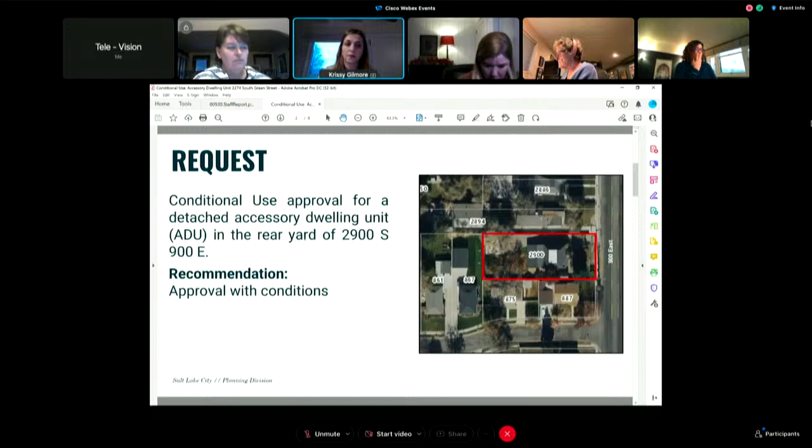So the ADU will be located in the rear yard of the single-family home, above a new detached two-car garage. The ADU will be 650 square feet, and the garage is proposed at 720 square feet. The ADU will be 12 feet from the north side property line, and 10 feet from the rear property line. One parking stall is provided for the ADU adjacent to the structure in the driveway, though the property is located within a quarter mile of a fixed transit stop.

A bus stop is located directly in front of the house and would not require additional parking. The building is proposed with a height of 20 feet, where the main house is also 20 feet.

So accessory dwelling units can be above the 17 foot maximum, but they can't go up unless they're the same height as the main house. They cannot go above 24 feet though. So that is why this one is allowed to go up to 20 feet, because the main residence is also 20 feet.

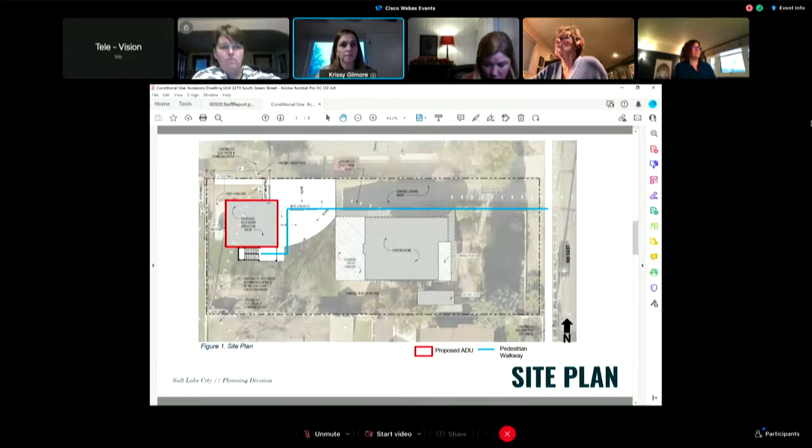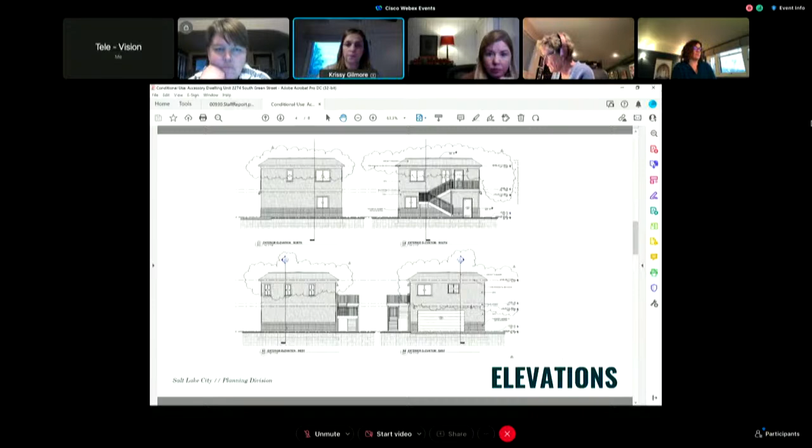So as far as public comments, staff received several public comments in opposition to the proposed ADU. They were primarily concerned with the height, general neighborhood compatibility, and concern regarding the ADU being used as a short-term rental. So staff has added one suggested condition, which was also at the request of the Sugar House Community Council.

That makes it clear that neither the main home nor the ADU can be used as a short-term rental. And then, as mentioned earlier, planning staff recommends that the commission approve the conditional use request with the one condition. The proposal meets all applicable standards in the staff report. So that concludes my presentation, and I'm happy to answer any questions. The applicant is also on the line.

Okay, Andrea, I saw you raise your hand. Any question? Thanks so much for your work on this.

I am confused because we already have a bylaw, as I understand it, that prohibits short-term rentals of any kind in Salt Lake City. So it seems like this condition is redundant, and I don't know why we would add it. Yeah, and you are correct on that. We do, the ordinance already states that they can't have a short-term rental. This is really the request of the community council to make that extremely clear that it cannot be used as a short-term rental. And it's up to the commission if you want to include that or not. But yeah, it is a given that they can't have a short-term rental. It just seems like we're adding paperwork here where we don't need paperwork. There's already a prohibition on it.

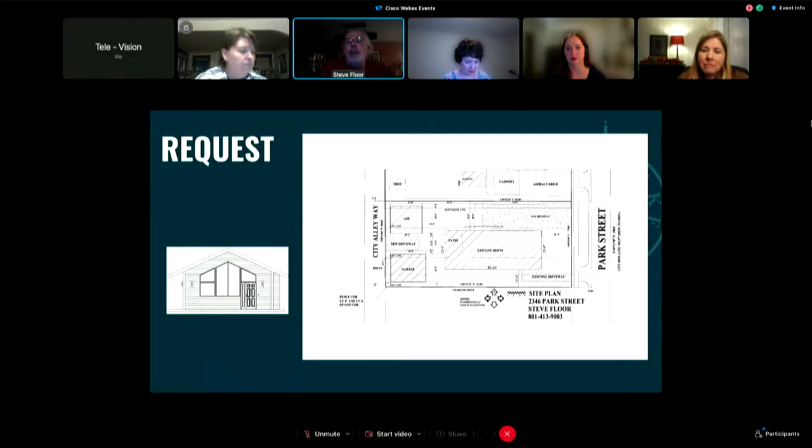Caitlin, I submitted to you a more updated site plan, but that was for purposes of utility lines, and I don't know if that needs to be looked at or discussed now, but it's sort of a better drawing, more up to date, with less superfluous information and more significant, important information, but I don't know if that needs to be discussed in this meeting or not.

I'm happy to pull that up if you'd like to display it, Steve. Sure, I'm proud of it, paid my architect a lot for that drawing.

Also, one thing the architect just missed is that to match the existing house, the ADU and the proposed garage will also be stuccoed in the same way as our existing house. It's not going to be lap siding as he showed in the drawing.

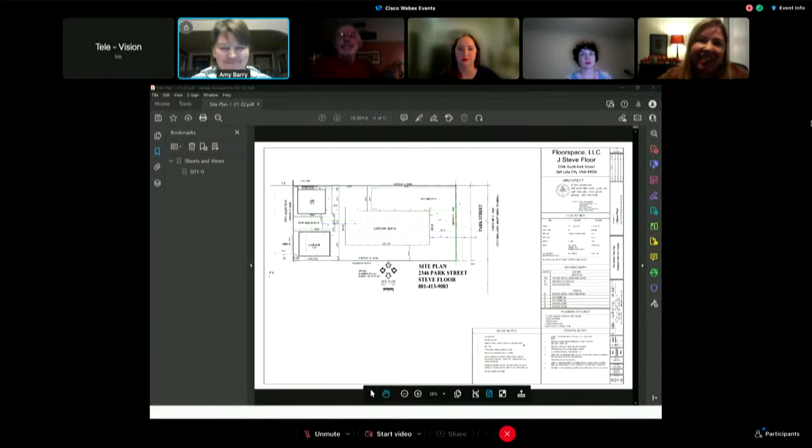All right, okay, here's that updated drawing. Ooh, that's beautiful. That's our new driveway. I was gonna say, well, how do I get one of those? You're transforming the place. Yes, we are. That's it, that's it.

Once again, it's essentially the same, and I think the stuff that's most relevant to the Planning Commission was also on the previous drawing, but here's the updated one showing, once again, utility lines, but I don't think that's something you guys want to discuss here and now, but if we want to, we can.

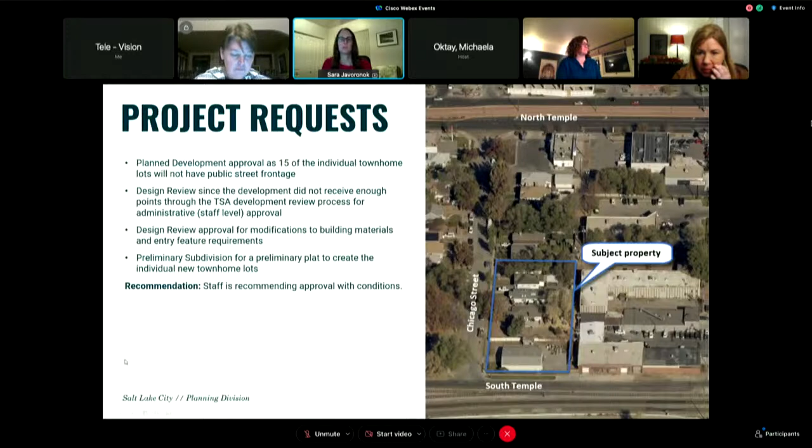To give you a brief overview of the project, the properties are located in the TSA UNT zoning district. The North Temple master plan is applicable to this area. The subject property includes 6 existing parcels with a total area of over 36,000 square feet. The proposal is for 4 buildings with a total of 30 townhouse units, with 7 to 9 units in each building. Each townhouse is to be located on its own lot. The exterior materials are primarily brick veneer, fiber cement siding, glass, and stucco. Each unit has an attached garage, with 16 units having single-car garages and 14 units having tandem 2-car garages.

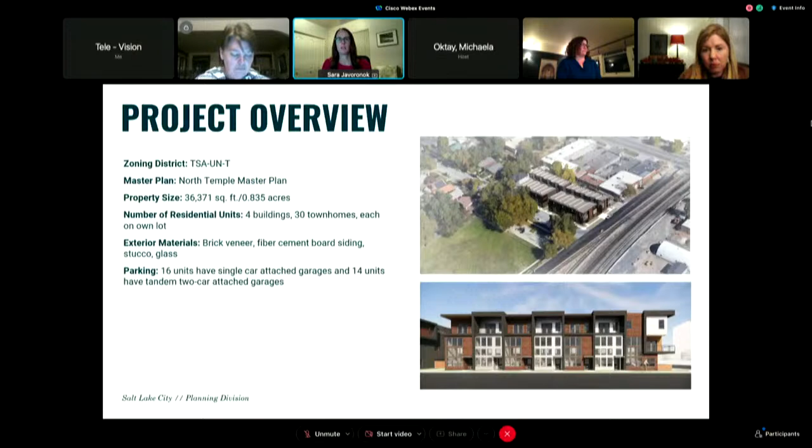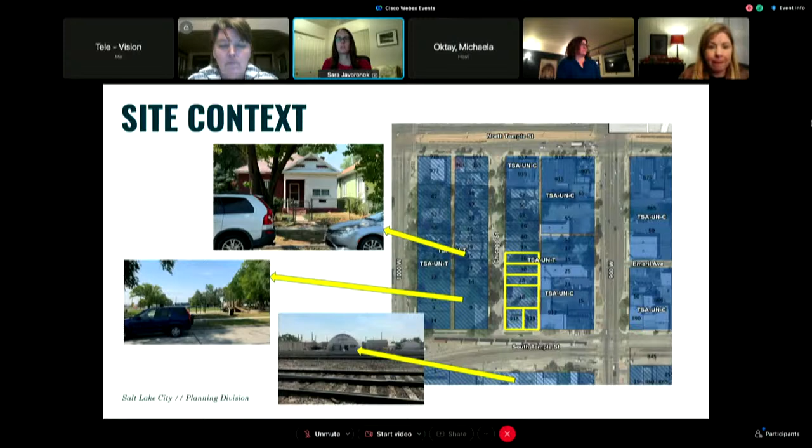There are a number of applicable standards, including the standards for the TSA zoning districts, the design standards in 21A37, and the standards for the 3 review processes: the planned development, design review, and preliminary subdivision. Detailed analyses of these are in the attachments to the staff report.

The applicant has requested several modifications from the standards through the planned development and design review processes. The planned development request is for lots without frontage. 14 of the 30 lots do not have frontage on a public street as required. Additionally, rather than complete a condo plat for the property, the proposal is for additional individual townhome lots, which may allow for additional financing options, including FHA loans. Staff recommends approval of this request.

This is a rendering facing northeast at the intersection of West South Temple and Chicago Streets, and it shows two of the design review requests. I'll talk a little bit more about these. One is for the stucco architectural element shown in the dark brown, and the other is for the entries on Chicago Street that do not recess or have canopies of the size required by the zoning district.

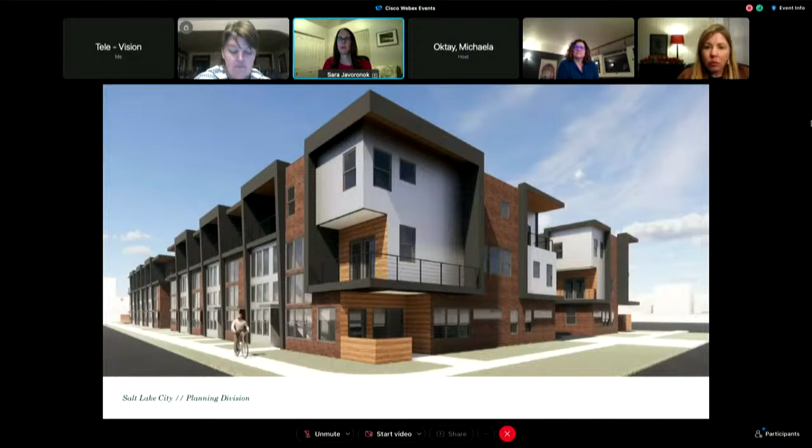Going into a little more detail on the design review request, it's for modifications to design standards in the base TSA-UN-T zoning district and also the standards in 21A37. Additionally, the project did not receive enough points for administrative approval and is required to go through the design review process. The first design review request is for the proposed stucco shown in the dark brown on the rendering and also visible on these elevations. The proposed stucco exceeds what is permitted for stucco or EIFS in the zoning district. The intent behind this regulation was to avoid larger areas and walls covered with stucco or EIFS. As proposed, the stucco is an architectural element rather than the flat blank wall that can be created with stucco or EIFS.

The second request relates to the building entrances. The design standards require that entrances have canopies, awnings, or recesses that are at least 5 feet. As proposed, the canopy is 2 feet and the recess is 4 feet 3 inches, which is less than the required 5 feet. However, it's staff's opinion that they meet the intent of the standard by breaking up the facade in 2 ways, with a combination of the recessed entry and the 2-foot canopy. Staff supports both of these requests.

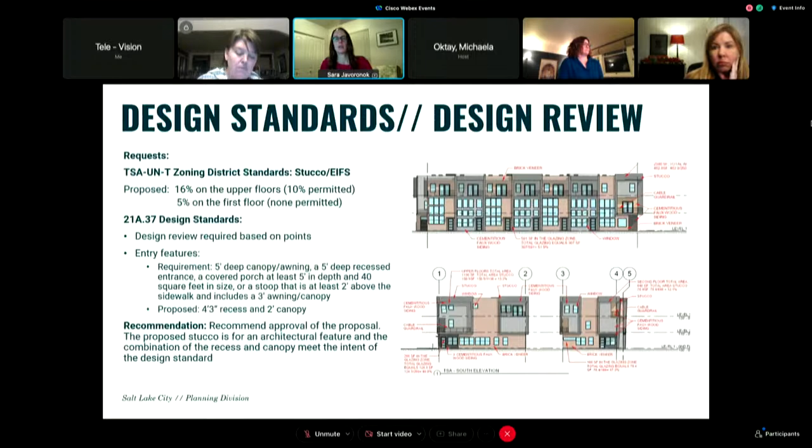As identified in the key considerations, the proposal is consistent with the city's adopted planning documents. The proposed townhomes meet the characteristics identified for development in this area and increase the variety of housing options. They're also located close to the sidewalk and have parking located behind and interior to the buildings. Additionally, the townhome lots are likely to provide homeownership opportunities.

As for staff's recommendation, staff sent notice of the proposal to the community council and did not receive a response. Staff did receive one phone call from a member of the public with questions and comments, which are noted in the staff report. There have also been 3 email comments submitted after the staff report was posted, and these have been added to the Dropbox. Staff recommends approval of the proposal with the conditions included in the staff report and identified on the slide.

Additionally, the applicant is here and has a presentation and is available to answer any questions. Are there questions for staff at this point, Commissioners? Okay, I don't hear any, so it looks like just Jarod Hall is up for presenting.

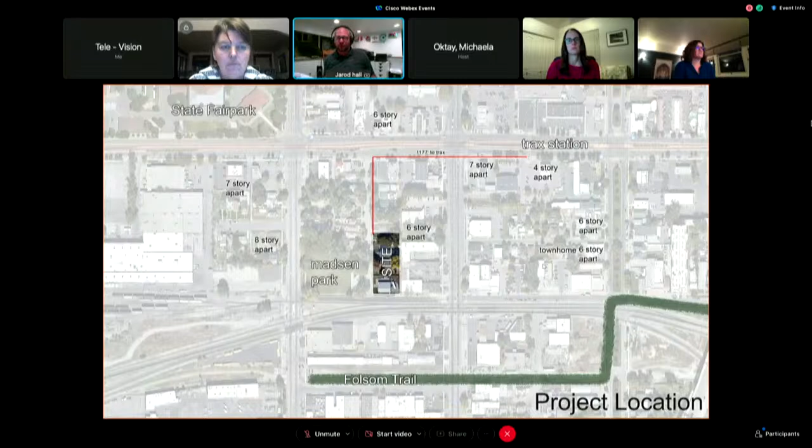So I'm Jarod Hall, the architect on this project, the Chicago Townhomes project. This is our context map showing where our site is located, at the corner of Chicago Street and South Temple, across the street from Madsen Park. It also notes so many of the other projects coming to this area, which are primarily apartment buildings because the zoning allows for apartments. So we're excited to be part of a townhouse project, providing a little different housing option here. Some images of the context.

That's one of the buildings in the area under construction. These are the more commercial buildings next to us and across the railroads to the south. We're really close to State Fair Park, which is always a big draw for the neighborhood. Mostly currently on Chicago Street is small single family houses. This is a diagram showing what it will look like in the middle, with stuff to the south much more industrial looking, and stuff to the north smaller houses.

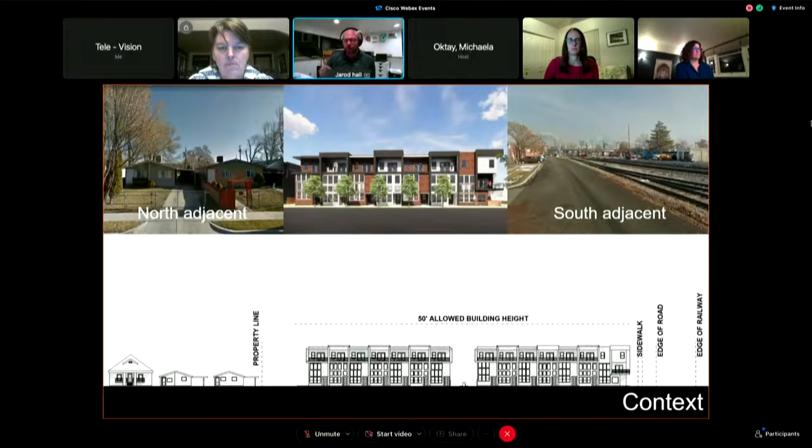We are a 3-story townhouse coming up to 30 feet tall, and 50 feet is allowed in the zone. So we're building under the allowed zoning height, but feel it's right as the neighborhood is still continuing to transition. Here's our site plan.

We have vehicle access on the south and the north, with the garages accessed off that private drive. As Sara mentioned, we have 44 parking stalls for our 30 units. It'd be 60 spaces max. Our overall density is 36.1 units per acre, and the North Temple Master Plan is calling for around 35 units per acre in this area, so we're hitting it right where we feel it should be.

Currently, strangely, along Chicago Street there is only one street tree in the park strip. Our intent is to provide a nice landscape with lots of street trees along that park strip, to help shade our units from that really harsh west sun.

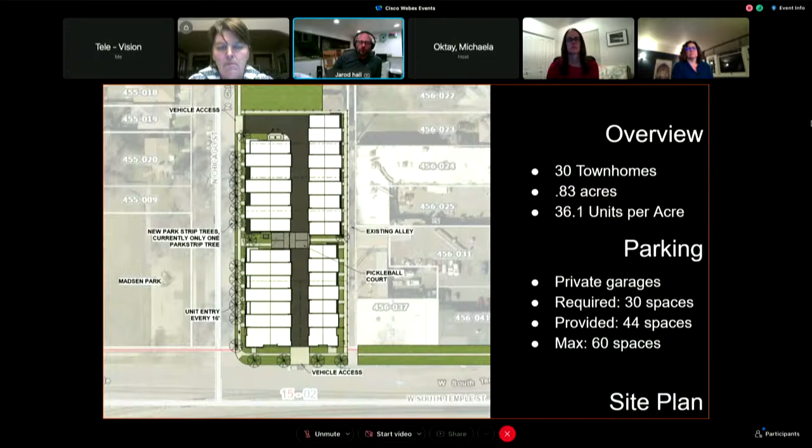So the first consideration is the lots without frontage. As Sara mentioned, doing townhomes allows a lot more financing options for end buyers, so we feel this creates more opportunity for home ownership than if this was an apartment or condominium, which could just be built as right. As you've all heard many times, for townhomes it's relatively expensive to get to the full TSA points. So I'll go over a couple things we've tried to do to make sure we're meeting the intent of those TSA points, even though we don't quite achieve the full 125 points.

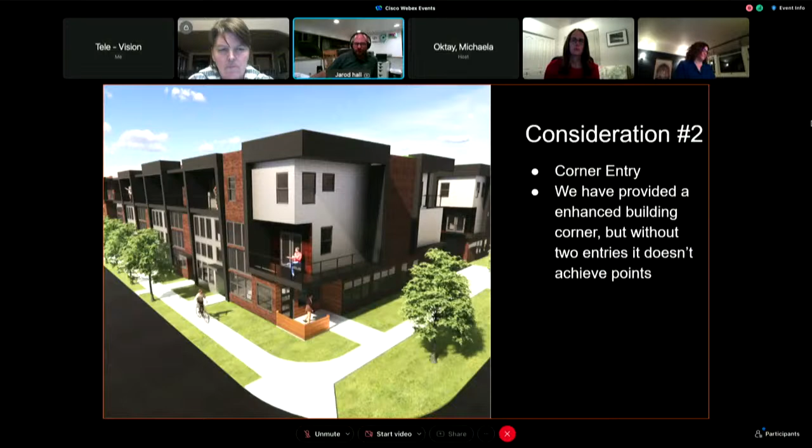The first is the corner entry piece, which we've tried to create as a really prominent corner entry, but when going over things with Sara, she said in order for it to qualify there'd have to be an entrance from both streets, which didn't make sense for us in a residential unit. The next one is eyes on the street—each of our units has the front door facing Chicago Street and balconies looking onto Chicago Street.

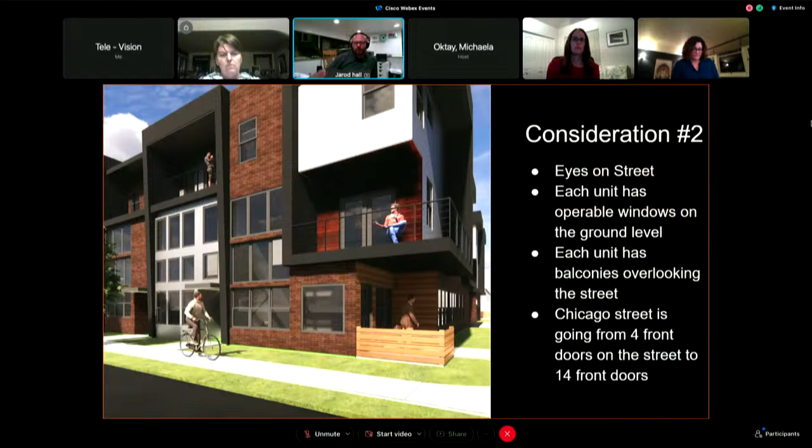Recently, as you are probably aware, Madsen Park has been closed because of some criminal issues. So we feel like getting people there, going from 4 homes that have ownership looking onto Chicago Street, to now 14 front doors looking onto Chicago Street, helps get eyes on there and reduce the problems as the park will be reopened soon.

Another consideration is wrapping parking in high quality materials. Private garages don't qualify for that point, but we are wrapping all of our base level, even the non-street facing facades, in brick to give a more durable surface so it stays looking great for a long time.

The third consideration was the master plan, which calls for increased density in this neighborhood. We are trying to provide a project that gently increases that density, going from single family house to a missing middle density, as the area is also getting quite a few larger apartments. That's my presentation, and I would welcome any questions.

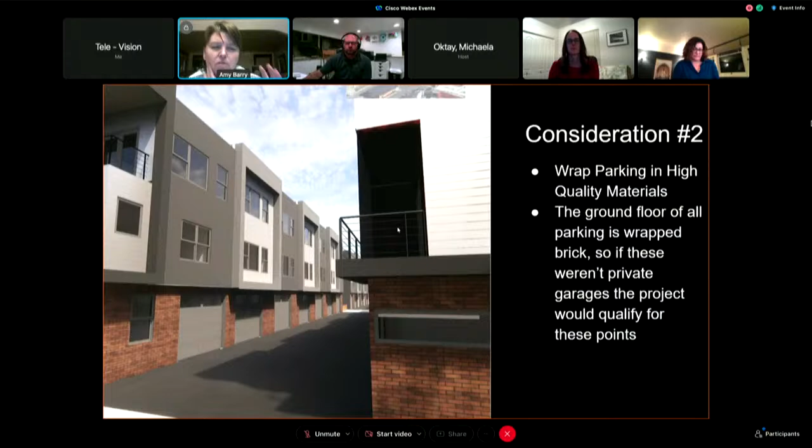So I have one quick question on the Chicago Street frontages. I'll say the intent of that ordinance and code for me isn't so much about breaking up the facade, it's really about engagement to the street and making it feel inviting. I don't know if you have a different view. This one's kind of shaded, and I don't necessarily feel those entrances on Chicago are meeting that intent. I'm curious what other ideas you'd have to make those feel more inviting and connected to the streetscape and pedestrian level.

One of the things unique about this project versus most we work on is the property line is actually quite a ways behind the sidewalk, versus normally the property line is right at the sidewalk. So we can't necessarily fence off this grassy area, but I would imagine as the project fills with people, each one will take that over as part of their front yard space, and it will become a much more engaging facade.

Design wise, what about lighting out here to indicate, hey, this is an inviting pedestrian front door experience? What about doing some things to soften it and make the entrance itself feel more engaging instead of this black hole stuck back there?

So yeah, we would put lights in that little soffit ceiling you see poking out. We felt like doing both the recess and the projection from the building helped identify each of those as an entrance well, to help make that engaging. But we would definitely be planning to put lights under here so that especially at night, those doorways stay very bright.

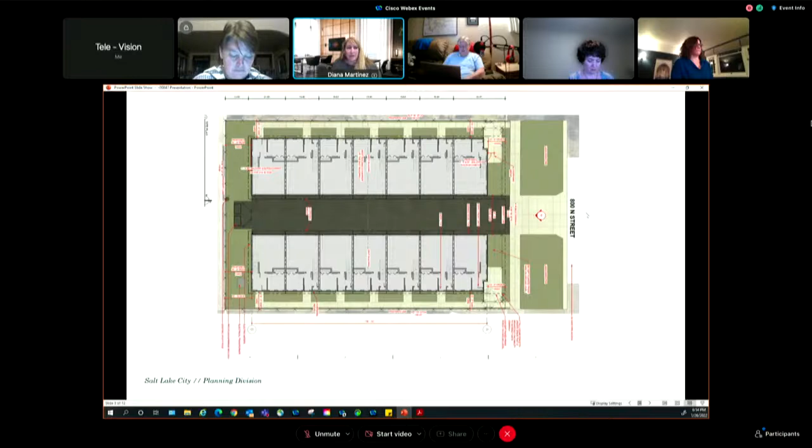This is the plan. I turned it so it would fit better on the slide. North is to the right, so 800 North is on the right. These are the 2 buildings, 7 units in each. They would have a shared drive that goes between the 2 buildings, coming out onto 800 North. This is the rendering for the proposal.

I added a second slide, so I'm going to go to that one. This is the proposal that Jarod originally brought in, and I took it to staff. We felt it didn't have enough on the front - it was very plain, with 2 blank walls and no connection to the street. So he came back with this, adding an additional balcony on both buildings and additional windows.

I want to key in on the drive, because that's one of the issues for a condition of approval we're recommending. The lighting is a little dim throughout that driveway, and even at peak noon, that drive area won't have a lot of light throughout the day. So one condition of approval we're requesting is more lighting. I've talked to the applicant about that, he's totally on board, and he believes the owners were going to provide more lighting, so there's no problem with them.

This shows the stories and height of the buildings. They will have the garage unit on the bottom, accommodating 2 parking spaces. They're a little shy on the footage, but they can manage it. The requirement for the MU zone is 1 parking space per unit, so he meets that, but he's also giving the ability to probably get 2 cars in each garage. This shows the top floor, which is kind of an outer deck floor.

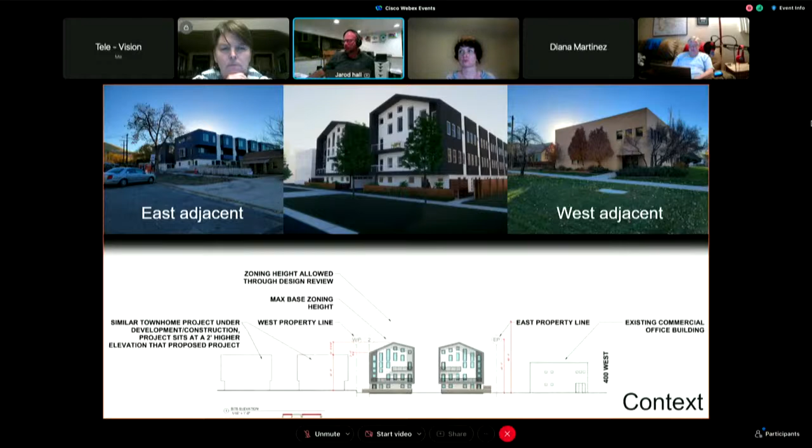Through design review, you're allowed to have a building height of 60 feet in this zone. So we are well under that, trying to follow in with the development pattern that has been happening there.

Our site plan - on this project, again, we have 14 townhomes on just under a half acre, which gives us 31 units per acre. We do have what I like to call the 1+ car garage. Salt Lake City requires a 20-foot wide garage to be called 2-car. We're like 19 feet, so you can fit 2 cars, but it's not technically a 2-car. There are 3 street trees out in the park strip that we intend to protect and keep, plus plant some new ones.

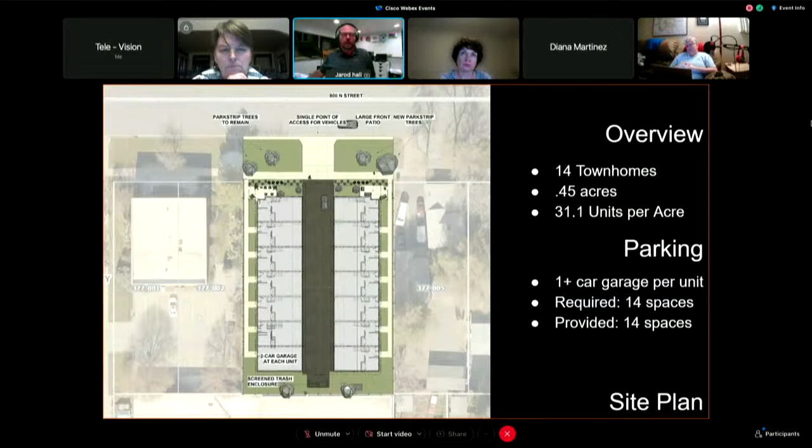For this project, we have a single point of vehicle access, which we like because it limits the points at which pedestrians and vehicles come together, creating a safer environment. Our trash enclosure is at the south end of the site, screened there. And then we have these little front porch balconies that we'll look at more in a future slide.

So again, just like the project we just looked at, our consideration 1 is lots without frontage. In this zone, condos and apartments are just allowed. As I was going over the project with the developer, we wanted to come before you guys and do townhomes so that we could provide that option for people, because it is so much easier for people to get financing to move in, and it allows them to be more affordable for the same type of unit than a condo would be.

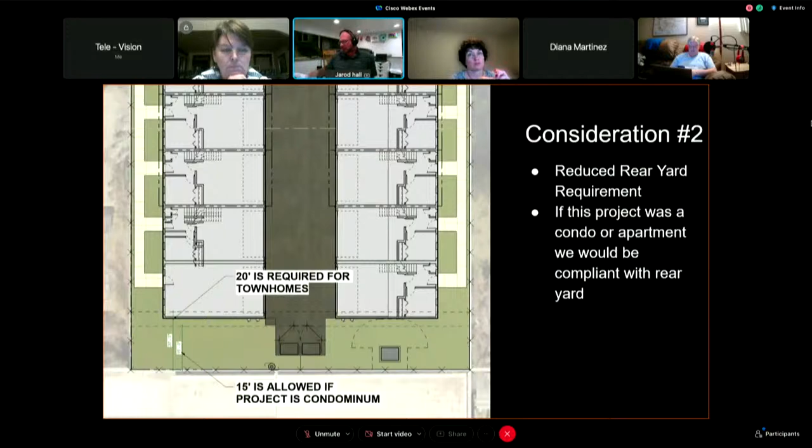On the rear setback request - if these were subdivided as condominiums or apartments, 15 feet would be an allowed rear setback. But because they are townhomes, it increases the required rear yard. We are asking to be allowed to use the 15 feet that would be allowed if this was a condominium or apartment project.

On our front yard, you can see we've got a little bit of paved front yard patio area. And then each one of these green things would be a little garden area specific to that front unit.

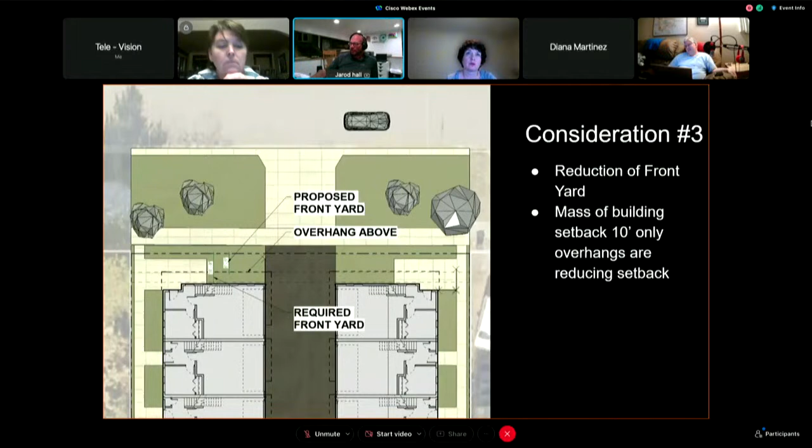The base zoning is a 10-foot setback. We are asking for a reduction to 6.5 feet, but only our balconies and roof eave overhangs extend into that. The mass of our building is still behind the 10-foot setback. This shows the same thing in a section. You can see the line for the 10-foot setback, and our balcony sticking out from the building a couple of feet, reducing that front yard setback.

But also in this particular neighborhood, the park strips are really wide. So even though we're not providing a giant front yard setback, the distance from the street to the building is still really large.

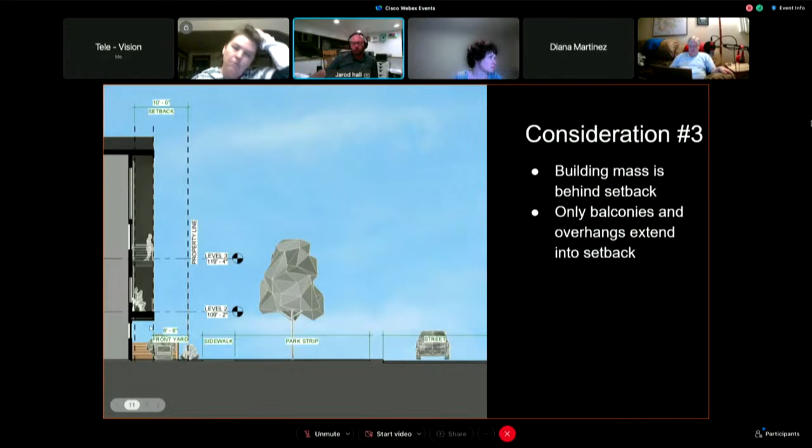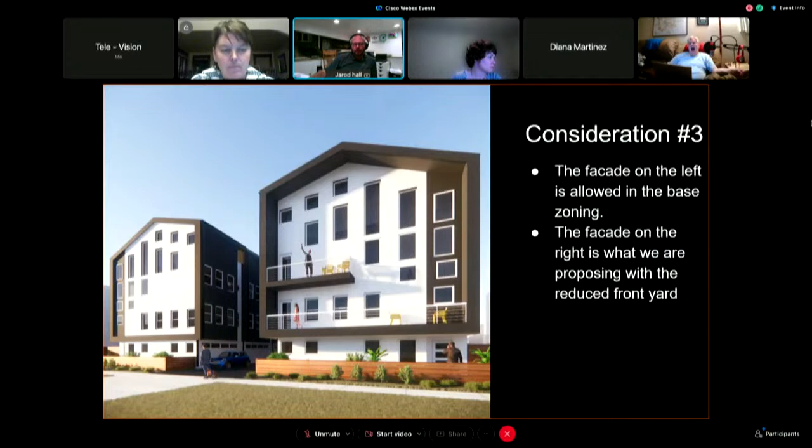On this image, the building on the left is what we'd be allowed per the base zoning. The building on the right is what we are proposing, with those extra balconies and places for street engagement, in exchange for the slightly reduced front yard setback.

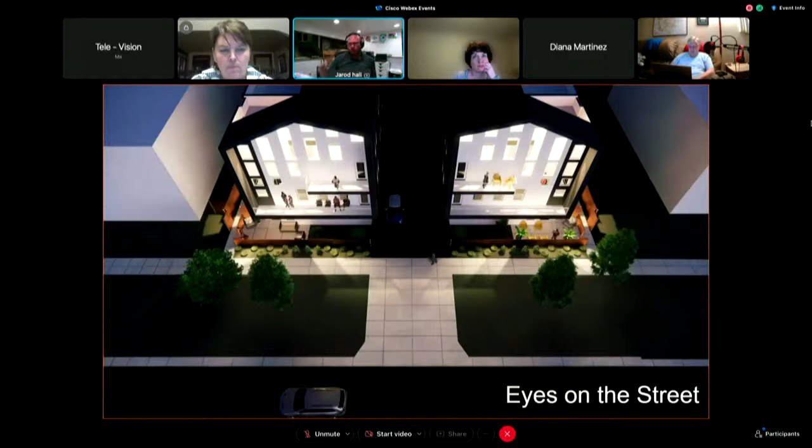Here's a rendering of what that front garden patio space looks like, and how many opportunities there are for people in the building to engage with people on the sidewalk. And this is how it would look at night from above, giving another view of the front balcony and how we're connecting to the street.

We did meet with Capitol Hill Community Council, and one of their concerns was short-term rentals. I spoke it over with the owners, and their thought is that in this particular zone, short-term rentals with the proper permits are allowed in the city, because they're not allowed in any single-family zones, but in this zone they are allowed with proper permits. The developers feel that artificially disallowing short-term rentals here would just put increased pressure on other areas of the city where they're not allowed. So by leaving it as per the base zoning for this project, it will give the demand for short-term rentals a place to go.

So that's my presentation, and I'll be happy to field any questions.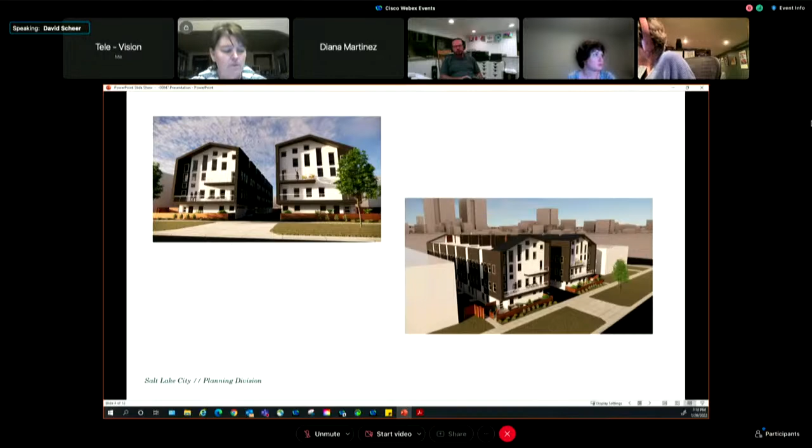I believe Judy Short wanted to speak to this item. Oh, no, not this item. Sorry, not that item. Pardon. There are no additional emails at this time, Madam Chair. Okay, with that, I will close the public comment period. Sorry, Madam Chair, can I add something? Do you mind? No, this is going to Diana, come back to you. Yeah, you're going to have a second, believe me.

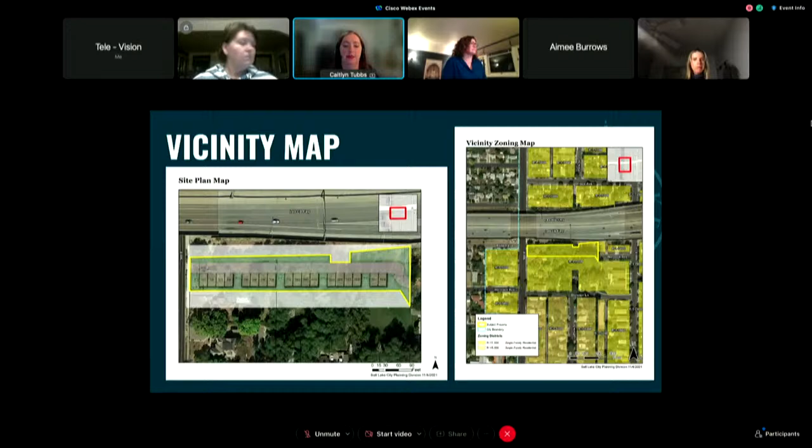As Madam Chair mentioned, this is a combined request for a general plan map amendment and a zoning map amendment for a property just to the south of I-80 at 5th East. It's a fairly large parcel, almost an acre in size, with frontage along both 5th East and Warnock Avenue. There is an existing abandoned house, built in 1900, currently occupying the site, but it is severely dilapidated and has been boarded up. The property owner and developer intend to remove it and construct single-family attached units, as shown in their concept plan.

Here are their requests. They are requesting a general plan map amendment from low density residential, which is 5 to 10 dwelling units per acre, to medium density residential, which is 8 to 20 dwelling units per acre. They're making this request to facilitate their zoning map amendment from R1 7000 residential to RMF 35, because single-family attached units are not permitted in the existing zoning.

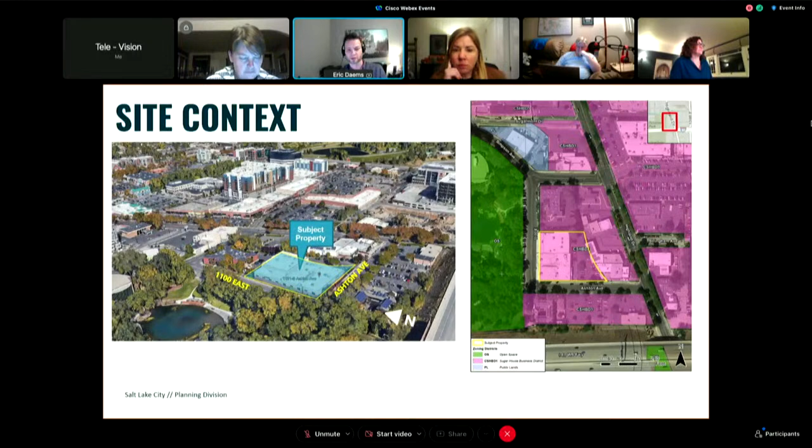So this is showing a little bit what's there currently. Of course, the 24-hour fitness has been demolished. You see Fairmont Park, and then bottom right here you see where buildings are being demolished to make way for the Alta Terra South project.

So just some facts on this project. Of course, we talked about the zone. It's in the Sugar House Master Plan. It's 1.28 acres, proposed as 102.5 feet tall, 10 stories. Building size is just under 340,000 square feet. The building would consist of 228 units.

They would all be market rate, but there would be a mix of studio, 1, 2, and 3 bedroom units. On the lower 3 levels, there would be 12 townhome style units, which would have access directly to the public sidewalk. All the parking for this building would be accessed from a single drive location off of Ashton.

Located interior to the building, there'd be 216 stalls. Considerable amount of amenities proposed with the building: lobby, leasing area, pet lounge, a theater, coffee shop, business center, fitness center, maker space, club room, outdoor terrace and pool above the 3rd level, which you'll see a little bit more. I'll speak to those a little bit further.

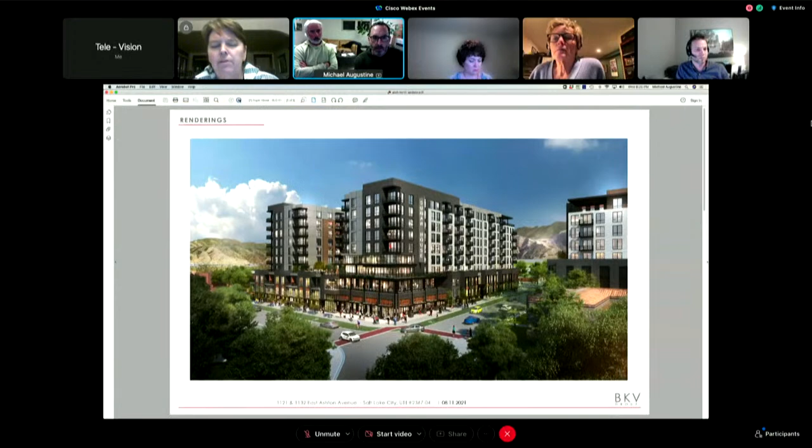That's this view here. Okay, I'll cruise through the remaining slides since I have about a minute left. I'm duplicating some renderings, but this is our northwest corner, with Fairmont Park to the right and 1100 East.

We have placeholders here and we've been working with the local art community. There are a lot of interesting things happening. Judy might speak to this more, since she's been a huge advocate connecting people to the community and helping us bring the right art, history, and murals to tie into Sugar House, not just a thoughtful rainbow design here as a placeholder.

Excuse me one second, let me pull this up. You may have seen this before, but a lot of our excitement has been around an amazing Fairmont Park frontage. We've designed the building with ground floor townhomes, amenities, and a pool deck. We also have a sky lounge on the back end, but many amenities on the first, second, third floor co-working space, and fourth and fifth floor fitness space all face the park.

That's it for my presentation. I know there were a couple other comments that weren't addressed, and I'm happy to go over those at the appropriate time. Thank you.

Commissioners, mainly Brenda I think, since I don't believe your question was answered. Would you like to pose your question now? Please go ahead. I've actually been looking at the plans more closely.

I can pull this up if this adds some color. This is a south elevation. Ah yes, there you go. So where's the ground level here?

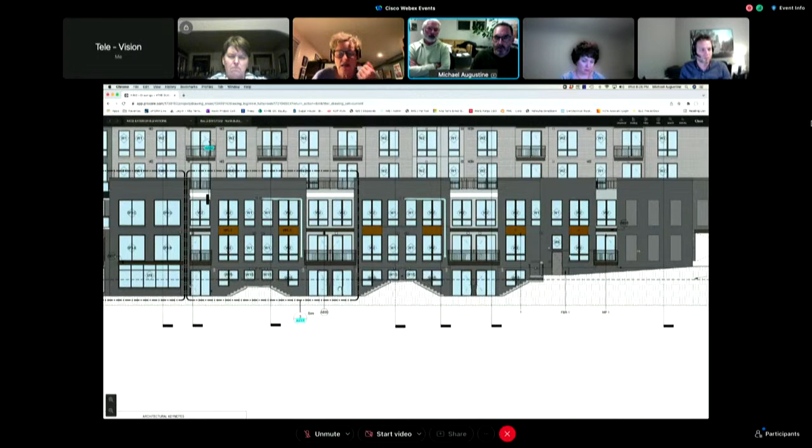The ground level, you can actually see - is that dotted line there the ground level? That's correct, yes. You know what it's going to look like, Brenda, is across from the Dodo. If you recall, there's a 21-unit apartment just up the street in Sugar House where the ground floor units on one section of the building are kind of submerged into the terrain, and it's just for a couple units at the Dodo. It's a really good example of what we're trying to accomplish here.

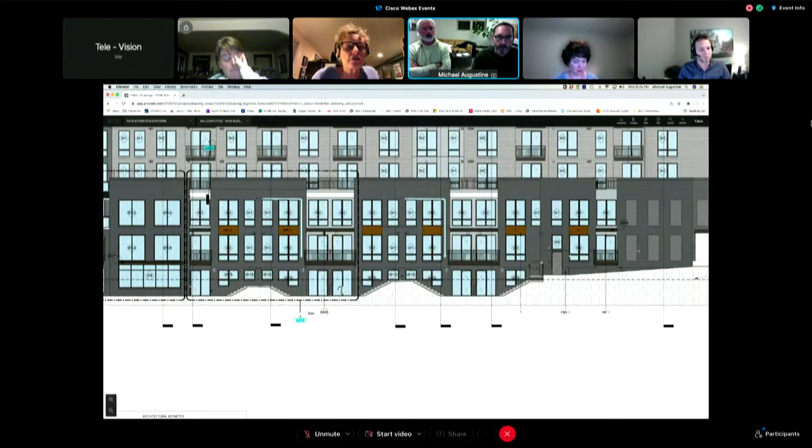So you have like 4 units here that are submerged? Well, actually, if the dotted line here is the level of the ground level - no, it's not that upper dot, I'm not clear what's going on. Where's the ground level? Where's the section line of the ground level? Yeah, no, that's a good point. I don't think it's shown on this rendering.

Yeah, I think you can see, Brenda - this is Sam Watkins, with BKV Group, the architects - and you can see how those landings step down, and towards the left we're at grade. Now inside the building, the parking garage ramps down, and those units that have these stairwells for their front entrances will have direct access from the lower level of the garage into their units.

I'm more concerned about the pedestrian experience at that point. Okay, I'm trying to find it - what is going on there with the sidewalk and the landings and the going down into the ground, what's going on there? Yeah, so the stairwells that go down are actually really hugging the building.

We had to pull those back so that it did not encroach, but we do have an extended sidewalk out. So we have sidewalk, we have the trees that are spaced. It's really not much different than the experience a pedestrian will have on the west side of the building. Because the stairwells originally were designed to come out from the building, but they were encroaching over the property line, so now they're just hugging the building, and we had to pull back these units. But the sidewalk that comes out - let me give me 1 second if I can find something.

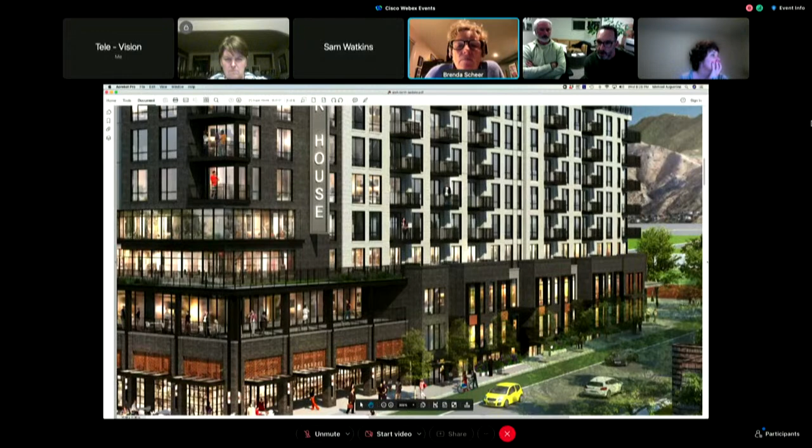I'm really not seeing this in your plans anywhere. I'm not seeing an elevation that shows it in my packet. But okay, I see the plan. There we go. Zoom in on that, it's hard to see. I'm trying to get it so that the resolution doesn't just go...

I see, so it kind of goes into the ground. Okay. And the units were tucked back in underneath the building a little bit, Brenda, so that we could get that utility off the pedestrian way in the landscape strip and maintain that cohesive connective tissue up to Highland Drive, Pib's Exchange, the liquor store and stuff all along there. And so they're sort of tucked into the unit. Okay, I was just trying to understand it. Thank you very much.

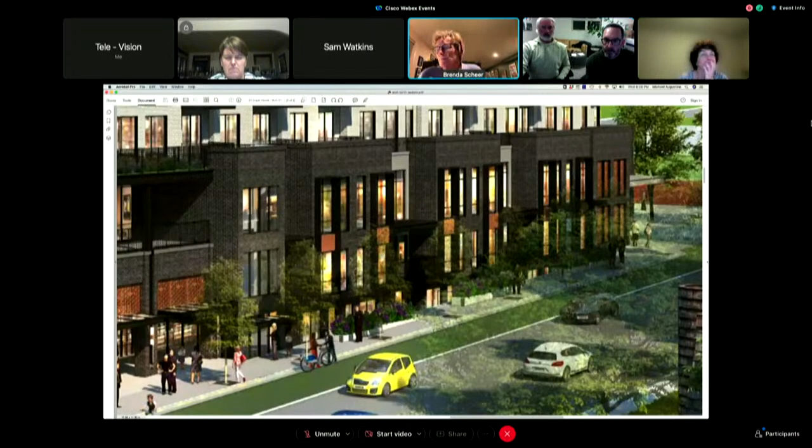Okay, any other questions for the applicant at this time?

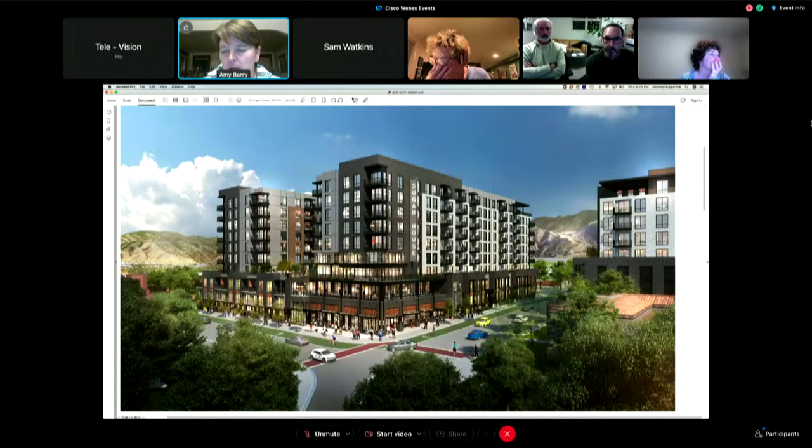We received the 1121 Ashton Avenue project on July 7th. At some point we were told the city decided to separate the design review of each building, so we'd be doing 1132 first. August 4th, we got notice from the city regarding 1132 and sent a letter in October. Up till July we'd had numerous meetings with these guys, giving them all sorts of feedback, and they sucked it up, and out came improved buildings. It's been great to work with.

We didn't hear another word about the 1121 project till I saw it on the Planning Commission agenda for tonight. This is not at all what I'd call satisfactory notice. Fortunately the developer had walked us through both buildings, but we never learned what design changes had been made, which makes it extremely difficult to comment. This is irritating. The developer did provide a slide showing the current materials, but it's difficult to interpret where they might be used on this large building.

The building is well designed and clearly meets the design standards required in the Sugar House Business District zone. I think this is the first building asking for nearly 105 feet of height, which is allowed under design review. The step back in the building's design helps modify the feeling of a tall building when walking by, and the amenity package is more than adequate. There are 4 crosswalks, 2 on the south end of Ashton and 2 on the west side of 11th East to connect with Fairmont Park.

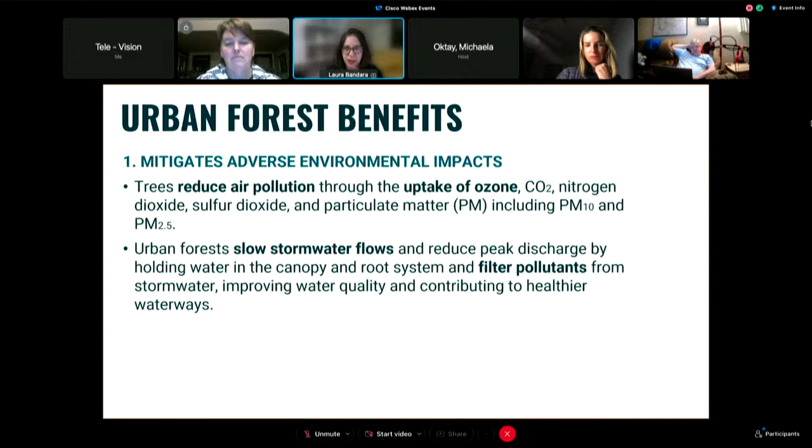A big thing we all experienced this past summer: urban heat island. We can reduce energy consumption and thereby fossil fuel use if we're shading buildings appropriately. The urban forest also matters for biking—people choose to bike more on shaded streets than unshaded streets in the summer.

We have research that shows people will stay longer and spend more money in retail districts with trees. Most people are familiar with trees' impact on increasing property values. But the other thing that's really interesting is that when you consciously incorporate trees into the design of neighborhoods, it provides more and better opportunities for neighbors to socialize and build community. There are studies that demonstrate an association between the number of trees and community cohesion in urban neighborhoods.

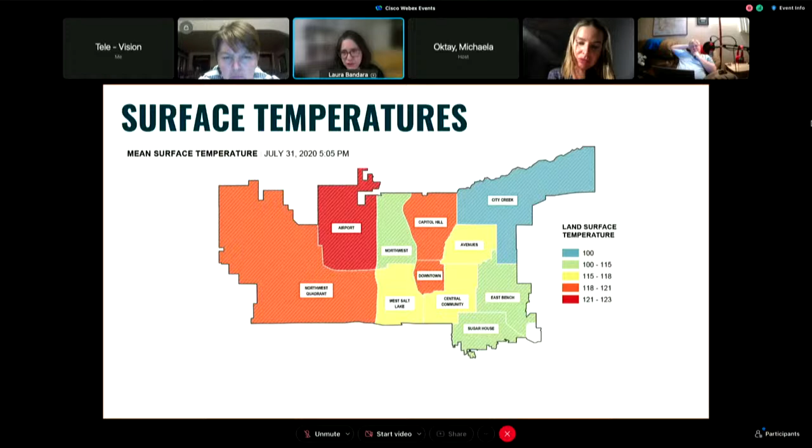Capitol Hill has higher surface temperatures than you might expect at first blush, but remember there are industrial areas there. Also this was taken at 5 p.m. July 31st, a west facing slope that's been heating up all day long. That said, the East Bench has west facing slopes too, but the surface temperatures still average out to be cooler.

Again, the redlining policies of the past have implications here. There's a complex interaction of variables, but at least looking at surface temperatures gives us an idea of which areas in the city need more shade and cooling.

We're working with partners at the University of Utah to get more accurate and specific measurements to help us figure out where the need is greatest so that we can address it. That said, even just looking at surface temperature alone, the correlation with redlining is fairly striking.

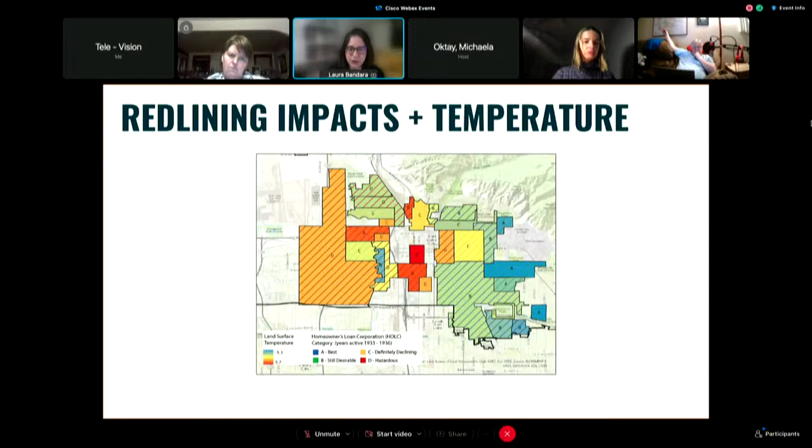That's also important because studies have shown a relationship between lower rates of childhood asthma in neighborhoods with trees. Areas with approximately 900 trees per square mile have lower childhood asthma rates than areas with fewer trees. So tracking where we have more kids and where there's more asthma is also giving us insight into which areas would benefit from more trees.

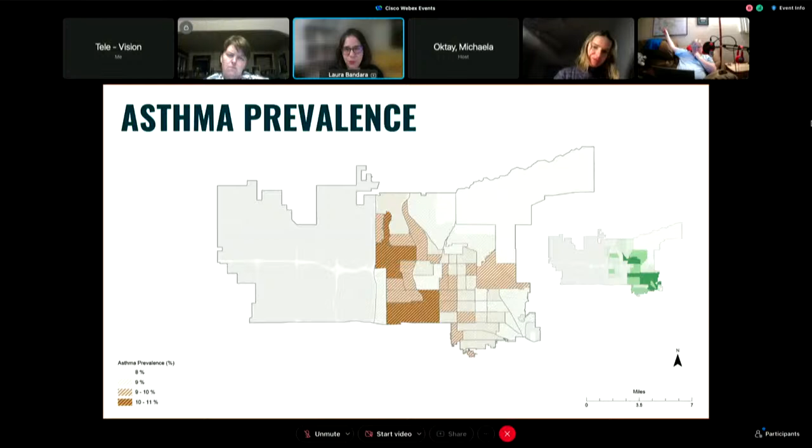There's also a relationship where those areas with higher asthma and fewer trees also have larger numbers of residents without health insurance.

We're also looking at how to provide solutions in the right of way, where we're seeing a lot more competition for trees, utilities, and other things as the city grows, but also providing guidance to our reviewers and inspectors so that we're all working from the same set of information in our day-to-day interactions with the urban forest.

So just one quick example solution. There's a lot at every level in the plan, but I'm just going to briefly highlight one example for paved areas.

So I mentioned earlier suspended pavement systems. Sometimes people refer to them with the brand name Silva Cell. These support the weight of the pavement, but they provide space for tree roots to grow without soil compaction, so the tree can grow big and healthy.

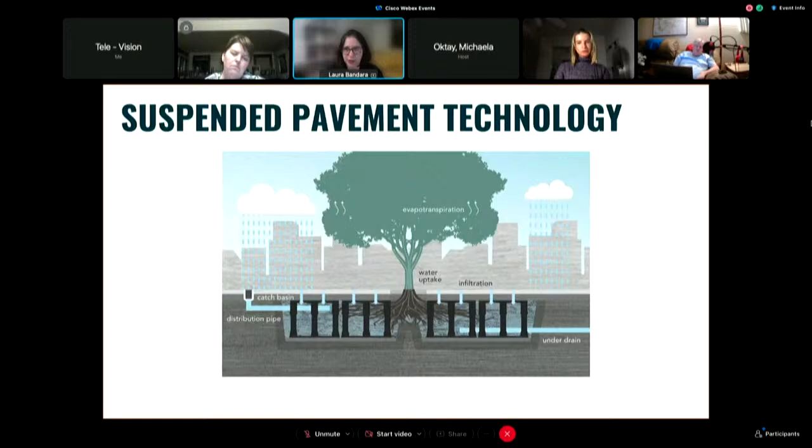A 10-year study in a commercial area in Toronto showed that these suspended pavement systems increased tree canopy while using a small surface area, provided stormwater management by reducing water volumes, improved water quality, and actually had a lower maintenance cost than other types of living infrastructure, because so much of that supporting stuff is underground and not being impacted by the flotsam and jetsam of urban life.

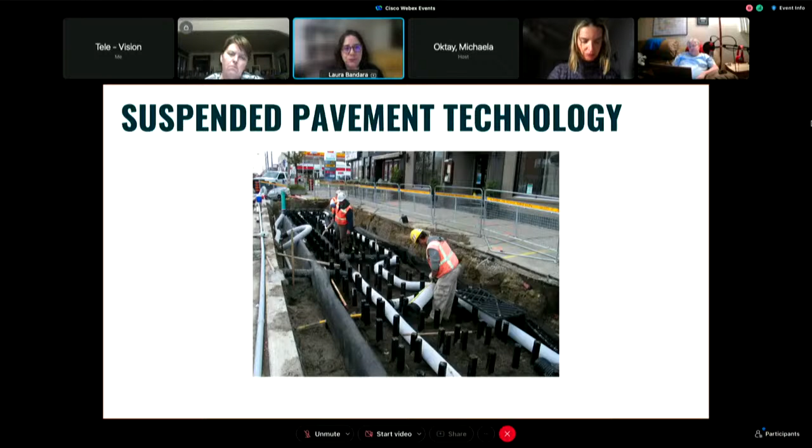So that is the end of my presentation. I know I kind of threw a lot at you all at once.

The memo I submitted had a lot more information about what our next steps are, and I also gave you the first 4 draft chapters to look at. So I'm more than happy to take questions now, but I also completely understand if you would like to reserve those questions for later. Thank you for your time.

Thank you, Laura. So your intention tonight is to get some feedback and ideas of things we'll be looking at for when you come back to adopt this?

Basically I wanted to make sure that you were aware that this was happening and that this was coming down the pike for you to make some decisions on.

Okay, and right now this is really focused on all of our streetscapes, parks, golf courses, land that the city owns, which I know you guys tend to make a lot more decisions about than private property. So I just wanted to reinforce that a lot of these higher level policy recommendations that the plan will be making have to do with the way we actually do business at the city.